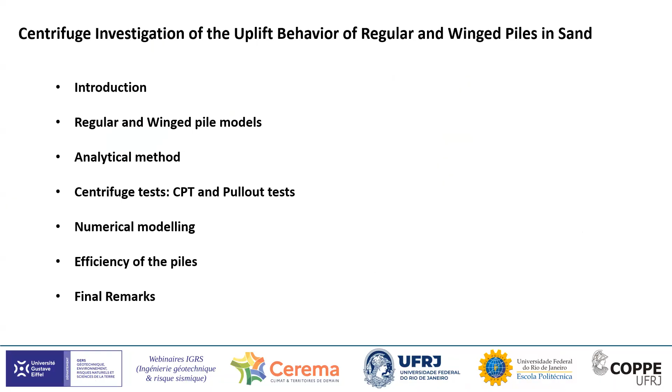Thank you very much for the invitation. I will talk about centrifuge investigation of the uplift behavior of regular and winged piles in sand. I will talk about the regular and winged pile models, analytical method, centrifuge tests, numerical modeling, efficiency of the piles, and final considerations.

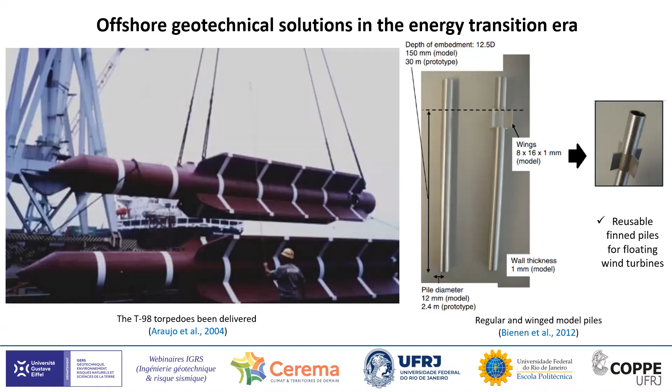The global energy transition has intensified the necessity for efficient geotechnical solutions for offshore areas. Among these solutions, we can consider torpedo anchors and also winged piles, because both of them have potential to enhance uplift resistance due to the increase of lateral area.

Torpedo anchor is a kind of pile foundation developed for anchoring oil and gas facilities in offshore areas, in conditions where the water depth is really deep, more than 1,500 meters. In this situation, we can reach clay soil, and the geometry of the pile is like this.

We have a cylindrical fuste or shaft, a conical point, and four fins, a typical geometry for this kind of pile. At the top part of the pile, we have a padeye where the mooring line can be attached for applying or transferring forces, either vertical or inclined.

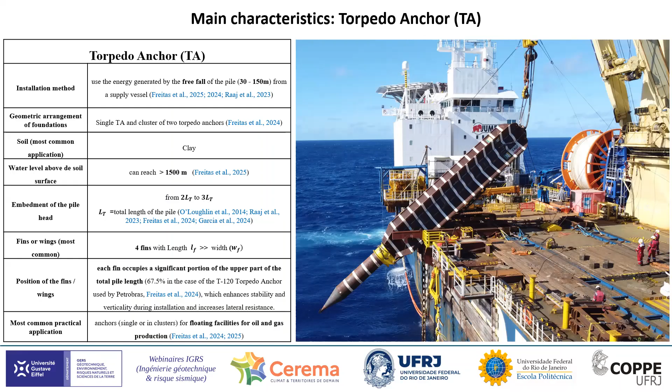On the other hand, winged pile anchors are commonly used for shallow water depths, at maximum 60 meters, predominantly in sand soil, differently from torpedo anchors that are installed by free fall. Winged pile anchors can be installed by drilling, vibration, or impact hammering.

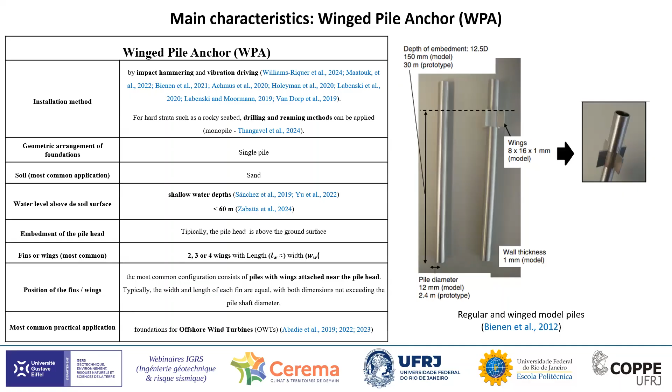Usually this kind of pile has 2, 3, or 4 wings, and the length of the wings is less than that observed in torpedo anchors.

There are many parameters and characteristics that can influence the behavior of winged pile anchors in sand soils. For example, the relative density, the drained or undrained condition, the geometry of the pile, including the quantity of wings, the shaft position of these wings, the shape, size, etc., and the material of this kind of pile.

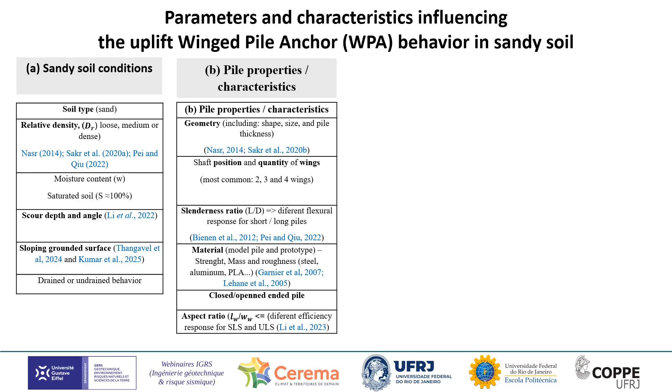The pile installation process is also important, since you can install the piles at 1G or in flight in the case of tests, and the position related to the container. The boundary effects can also influence the behavior and uplift capacity of this kind of pile.

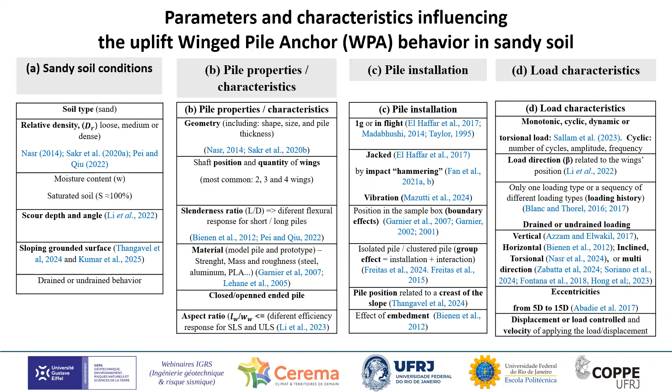The load characteristics are also important. In this case, we are talking about vertical uplift capacity, a simple one, since the geometry is really complicated for these piles.

Now I will show you the regular and winged piles that were adopted in this project. We used 7 kinds or types of piles. A regular pile, RP, is a typical pile like a monopile, without wings, with 6.5 meters of diameter.

The PA pile is a kind of pile with fins all the way down the pile shaft, with the same volume and weight as the regular pile. It was obtained by reducing the diameter to have an equal weight to the regular pile.

The piles with a fin halfway down the shaft have the same geometry as the equivalent PA pile, but with fins only at the halfway point down the shaft of the pile.

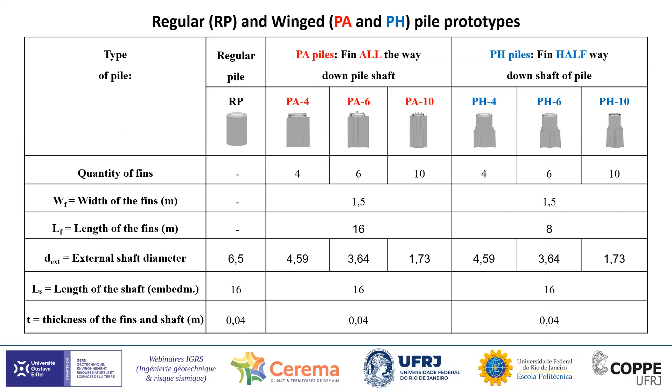The 7 model piles were fabricated using a specific technique to permit the construction of fins for each pile. In this figure, we can observe the differences in terms of diameter, shaft diameter, and fin or wing position in each pile.

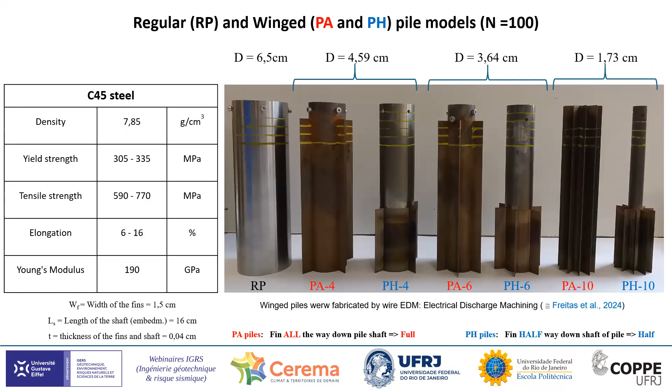For preliminary analysis, we could use an analytical method, a simple one, where we can estimate the actual capacity of the pile under tension, for uplift capacity, using simple formulations for average unit skin resistance that consider some parameters for soil, and of course the effective overburden pressure. The lateral area of the pile is a hypothesis considered in this simple calculation method.

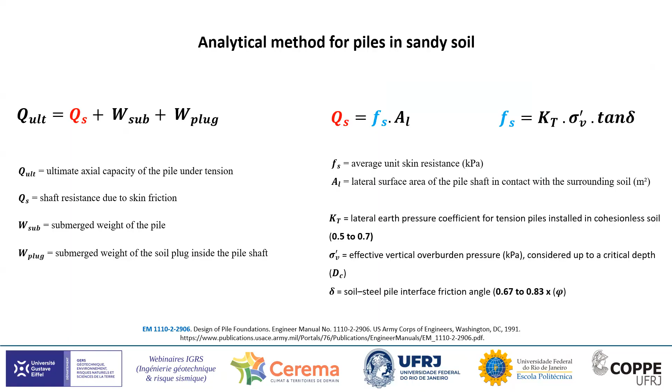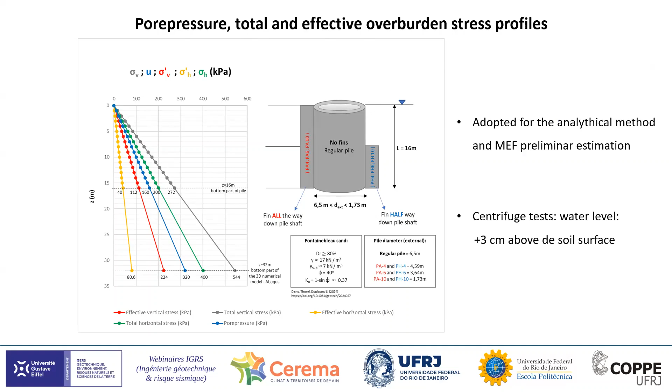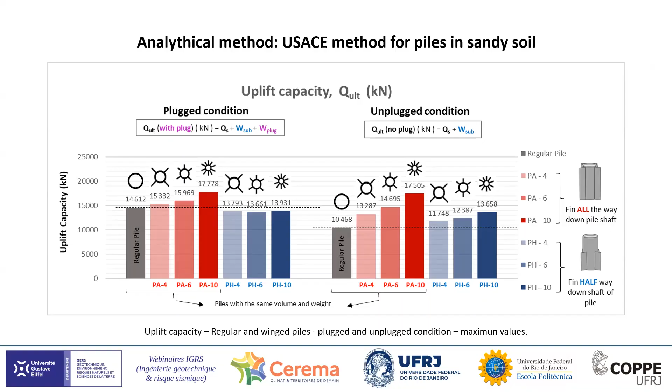For our piles, we consider a simple relationship between geometry, pore pressure, and effective overburden stress profiles, as you can see in this figure. All the results are summarized in this slide, where we can see that the results from the analytical approach are proportional to the quantity of fins and the length of fins in each pile.

The centrifuge tests were all performed at Université Gustave Eiffel with a dream team: Mathieu Blanc, Christelle Abadie, Zheng Li, Luc Thorel, and I. All the activities were divided between geotechnical centrifuge tests and finite element method analysis, in order to compare all the results. I will show some of them today.

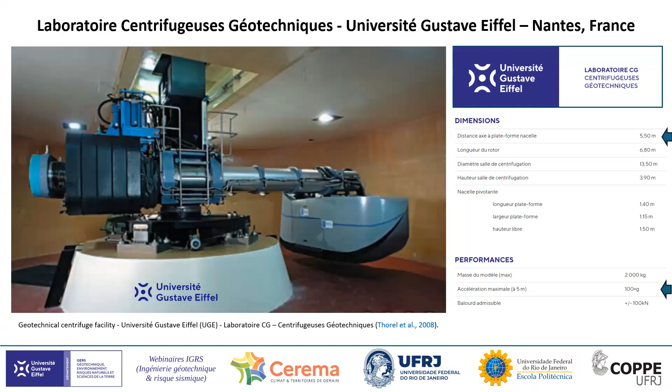The laboratory at Université Gustave Eiffel comprises a geotechnical centrifuge facility with a radius of 5.5 meters, and can place tests at a maximum of 100 G.

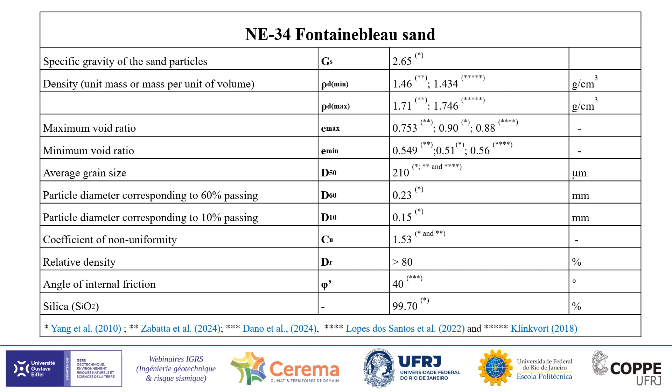I utilized in these tests Fontainebleau sand with parameters well known in the literature, a summary of the main characteristics is presented in this slide.

For the preparation of sand beds, I used two containers, and I utilized a sand raining technique.

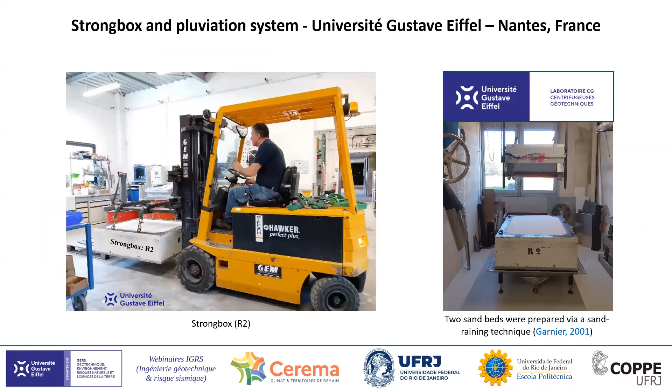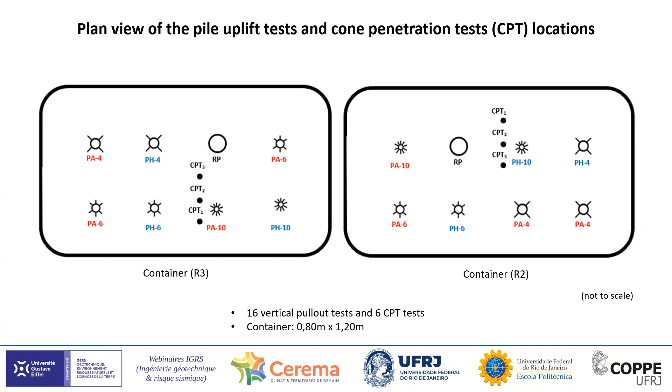The plan view of uplift pile tests and cone penetration tests adopted in this research program are shown now, without scale, only to represent all the tests. We performed 16 uplift pile tests and 6 CPT tests in 2 containers. All the installations were performed at 1G using a vibration-based pile installation apparatus developed at Université Gustave Eiffel, which will be improved in future research.

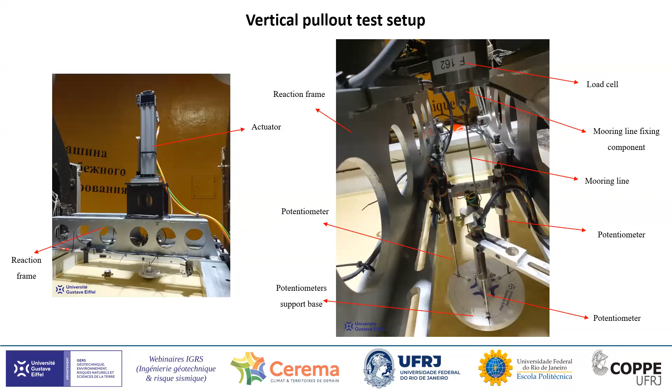The setup for the vertical pull-out test is presented now. We can see the reaction frame that is important for this kind of test, the load cell to measure the forces during the tests, the mooring line that connects the load cell with the head of the pile, and 3 potentiometers used to measure the displacement of the pile.

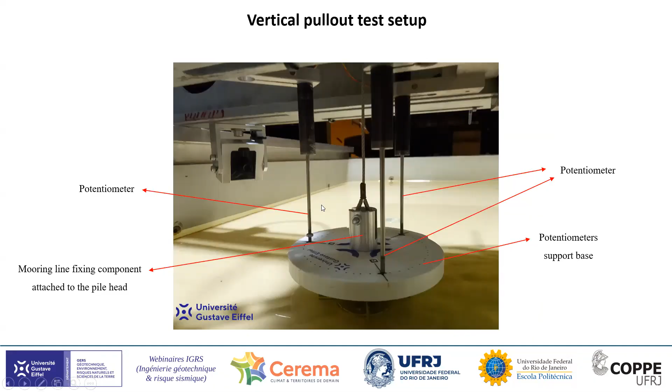In detail, the 3 potentiometers, the potentiometer support base, and the mooring line fixing component are similar to what I've already shown in the earlier slide, which was also adopted at the head of the pile.

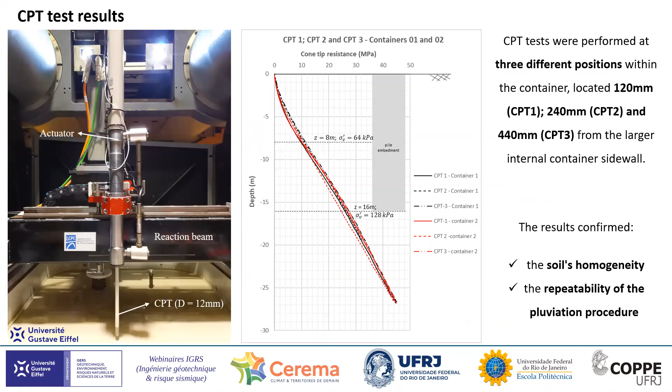The cone penetration test results showed us that the cone tip resistance is quite similar between the 6 tests performed in different positions in the container. The results confirm the soil homogeneity and repeatability of the pluviation procedure, which is important in order to compare all the uplift test results.

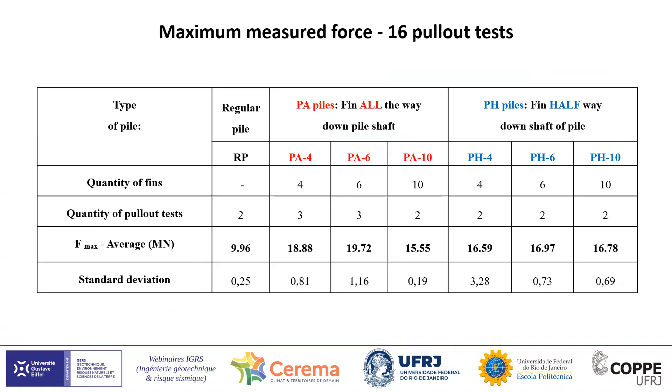16 uplift tests were performed. Here I present the maximum force in terms of average. For each pile, at least 2 tests were performed, and I will show these results in a graph. Now we can observe the failure data.

It's important because we can observe that adopting wings, we can improve the uplift capacity. And there is a similar tendency in terms of displacement for all the piles, full fins and half fins.

But we can observe also that for piles with 10 fins, there is a kind of inversion of behavior. I mean, piles with half fins showed greater forces at failure than piles with full fins.

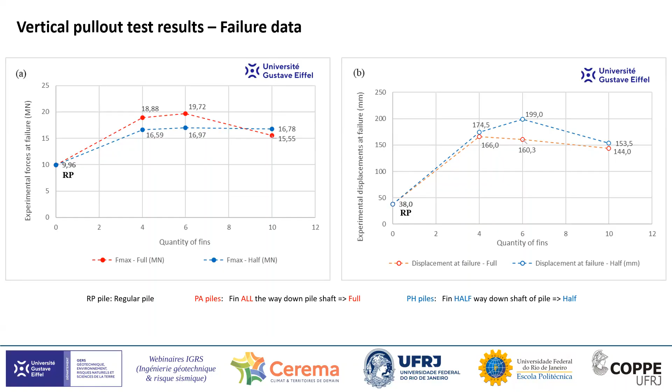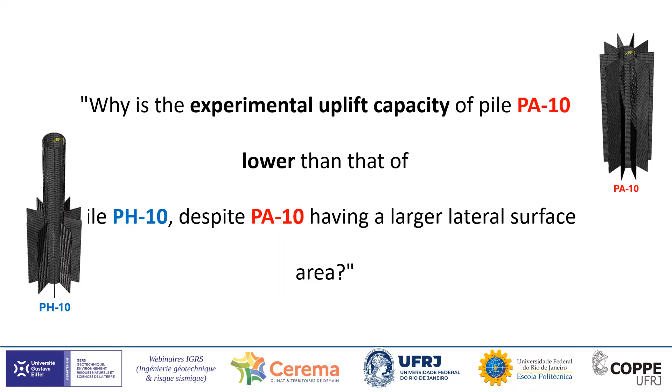And we can ask, why is the experimental uplift capacity of a pile with full fins lower than that of piles with half fins, despite the first one having a larger lateral surface area? We can get the answer to this by observing numerical modeling compared with some observations done during the tests.

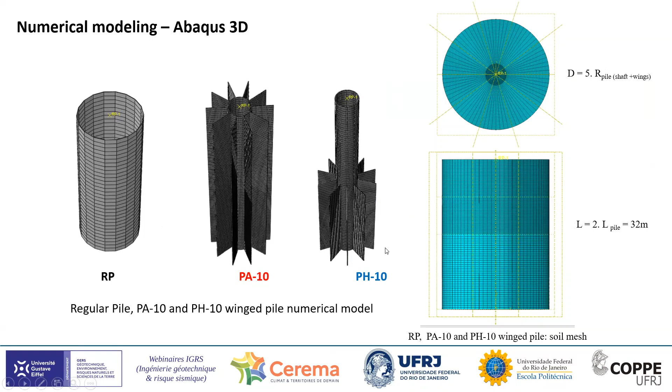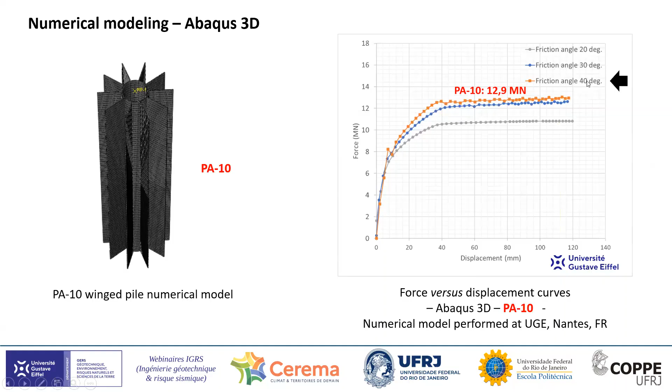Now I will present for you 3 kinds of piles: a regular pile, a pile with 10 fins full way down the pile shaft, and a half shaft version. For this first one, we can observe the results for 3 kinds of friction angle, and I will adopt for discussion the higher one because it agrees with the characteristics that I've already shown you earlier.

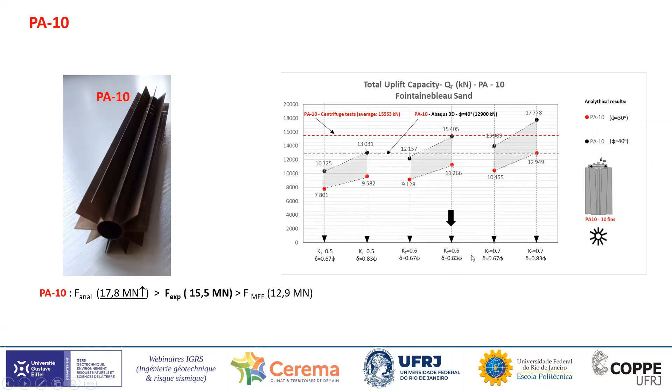There's good agreement between the centrifuge test, the experimental one, and the parameters adopted in the analytical formulation for the pile with full fins. When we compare the half fins with the full fins,

we can observe a different trend between both of them. In fact, for this second one, it's a tendency more similar to what we reach in the offshore area, since the API and this kind of analytical approach are usually conservative when compared with tests.

And we can observe also that with experimental results and a finite element method approach, piles with full fins reached less force than piles with half fins, in contrast with the analytical approach that considers all the lateral area.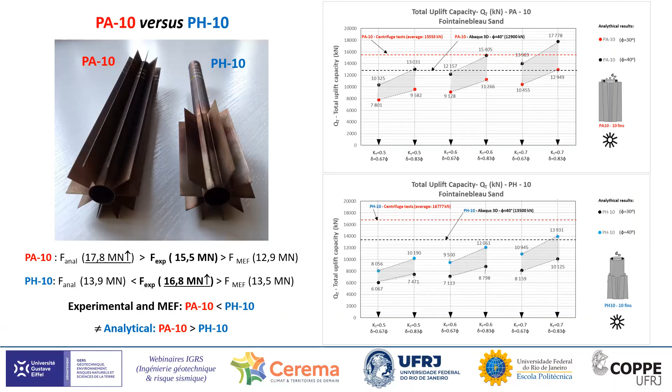And we can observe also that during the tests, there is a kind of soil plug formation between the wings, outside the area of the piles, which is in agreement with the observations reached in the numerical analysis. So, in spite of the analytical approach considering all the lateral area, there may be a trend where you cannot consider all the real lateral area, since this kind of behavior was observed in both the numerical analysis and the experimental one.

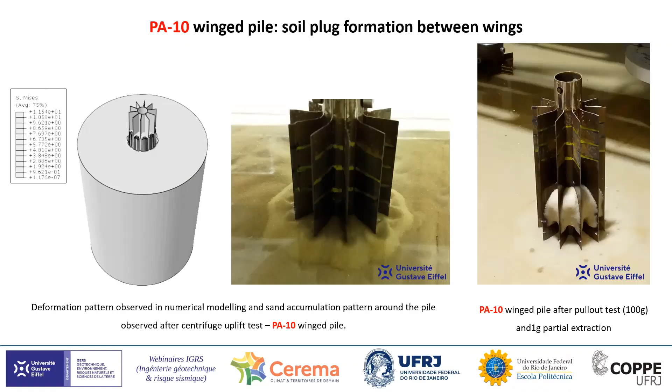For the regular pile, I will present the results because I will use this data for calculating the efficiency of all the piles. We can observe that for the regular pile, the best fit for the analytical approach was in the lower part of the parameters.

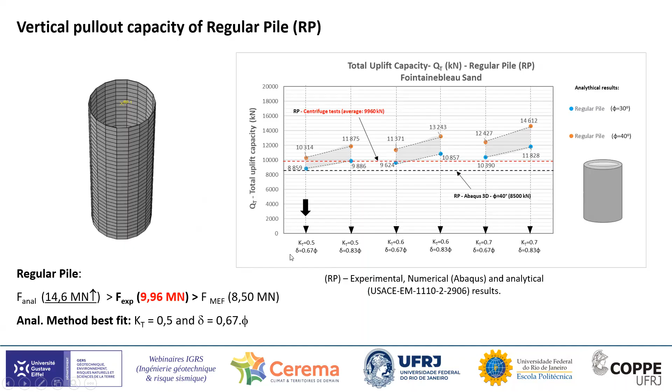The efficiency of the piles was estimated, and we can observe that there are many kinds of approaches for estimating the efficiency rate between forces and weight of piles, etc.

Now I utilize the relationship, or the rate, between the maximum force for a winged pile related to the maximum force for a regular pile without fins, for calculating this one.

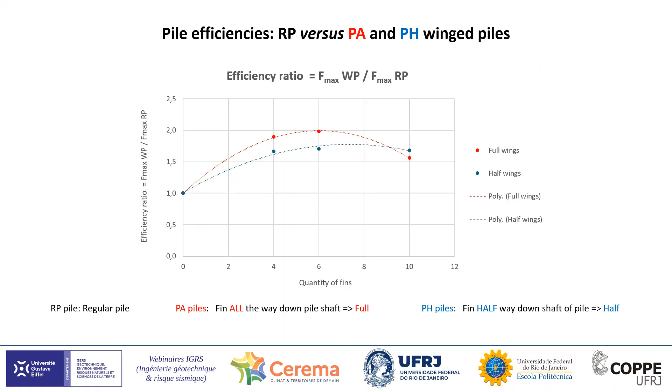Final remarks. We could observe that the CPT tests confirmed soil homogeneity and repeatability of the pluviation procedure. The experimental and numerical results showed different tendencies or trends when compared with the analytical approach, showing us that the analytical approach could be used with a little bit of caution.

Pull-out tests for all the winged piles showed the best performance when compared with regular piles. And the efficiency is really greater for piles with fins, with efficiency higher than 1.5.

And the database is for numerical model validation, which I continue to work on with Zhang.